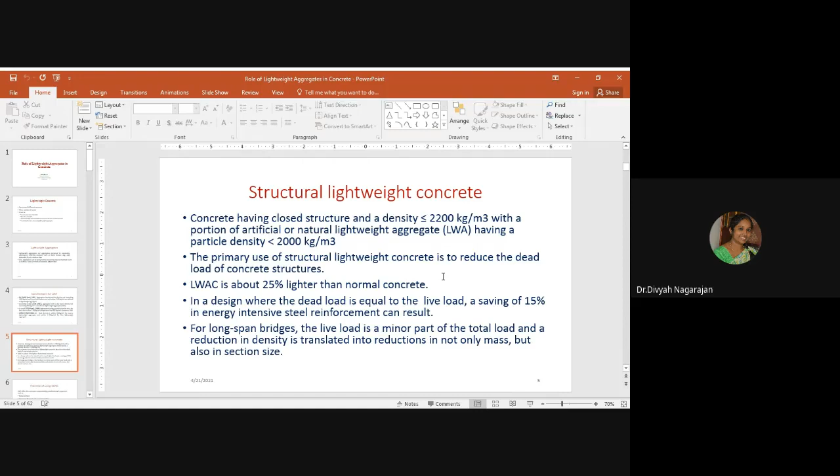For long span bridges, the live load is a minor part of the total load, and reduction in density is translated into reductions not only in mass but also in section size. Potential of using lightweight aggregate concrete. The lightweight aggregate concrete, when it is used as a construction material, has received considerable attention from the construction industry in recent years, owing to its sustainability, its nature, and we can design the concrete similar to the normal weight concrete. Therefore, the lightweight concrete is similar to normal weight concrete, except that it has lower density.

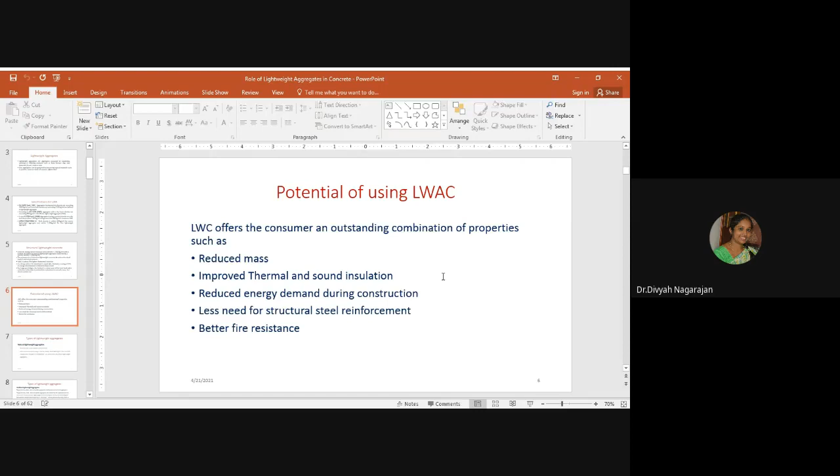The lightweight concrete offers the consumer an outstanding combination of properties such as reduction in mass, improved thermal and sound insulation, reduced energy demand during construction, less need for structural steel reinforcement, and better fire resistance. Types of lightweight aggregates. The lightweight aggregates are classified as natural lightweight aggregates, artificial lightweight aggregates, aggregates from industrial byproducts, aggregates from organic and inorganic solid waste.

Coming to natural lightweight aggregates, pumice, tuff, scoria, cinders, and diatomite are naturally available lightweight aggregates. This pumice, tuff, and scoria are from volcanic origin and they are formed by natural expansion. But this diatomite is a siliceous sedimentary rock. Since they are naturally formed, these aggregates are found only in specific regions. So they cannot be widely used, and they are used for producing lightweight concrete only in a particular area. Structural concrete having a density within 1630 kilogram per meter cube to 1885 kilogram per meter cube, and concrete compressive strength of 24 to 55 Newton per mm square can be produced using these aggregates.

Coming to artificial lightweight aggregates, expanded clay, shale, slate, and perlite aggregates, cold bonded and sintered aggregates come under this category. They are produced by some kind of manufacturing process in the industries. The raw materials used for producing these aggregates are obtained either from natural resources or from industrial byproducts. The process used in the production of lightweight concrete is either agglomeration or expansion process.

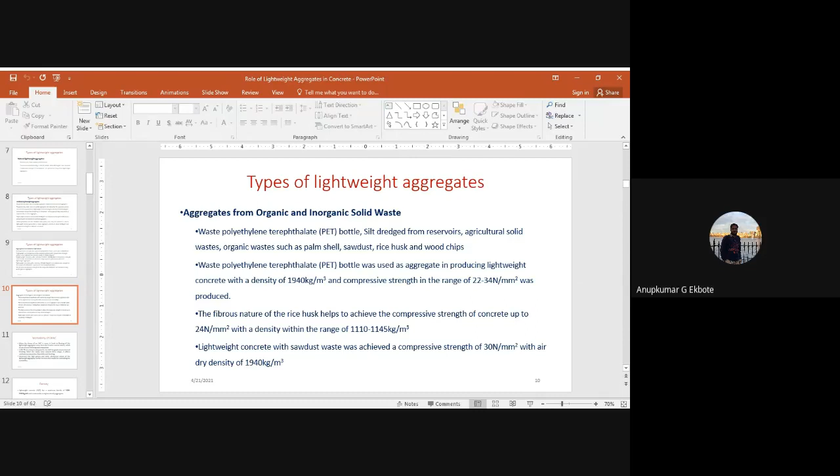The fibrous nature of the rice husk helps to achieve a compressive strength of concrete up to 24 Newton per mm square with a density within a range of 1110 to 1145 kilogram per meter cube. Lightweight concrete with sawdust waste was achieved with a compressive strength of 30 Newton per mm square with air dry density of 1940 kilogram per meter cube.

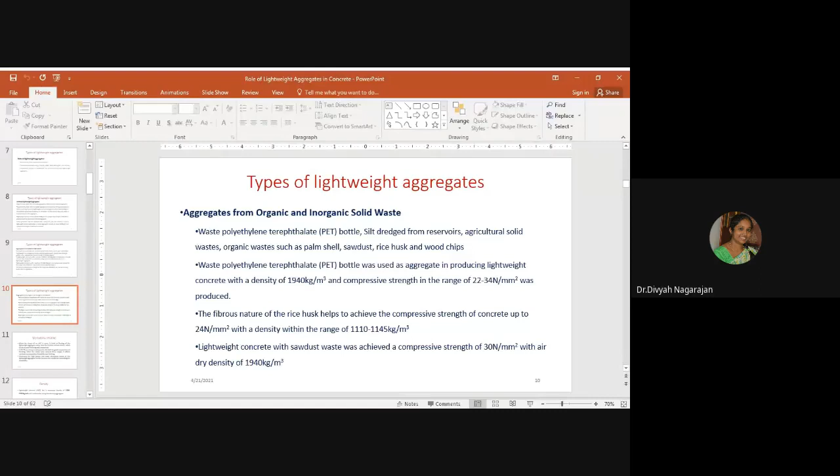Workability of lightweight aggregate concrete. This is the matter of concern when lightweight aggregates are used in concrete. The workability of lightweight aggregate concrete differs from normal weight aggregate concrete. When the slump of the lightweight concrete is more, it leads to floating of lightweight aggregates away from the heavier cement matrix, which results in poor finishing and compaction.

High slump is not required for better finishing and compaction of lightweight concrete, as in the case of normal weight concrete, since the work done by the lightweight concrete by its gravity is much lower than that of the normal weight concrete. These reasons encouraged the ACI code to limit the slump of the lightweight concrete to 100 mm for better achievement in finishing and compaction.

And studies have reported that a slump of 50 to 75 mm is adequate for lightweight concrete for good compaction and finishing. When the slump value exceeds these ranges, it affects satisfactory compaction, flowability, and finishing. Moreover, the highly porous and water absorption nature of the lightweight aggregates further increases the trouble in controlling the workability.

Coming to density, the lightweight concrete has a maximum density of 2000 kilogram per meter cube, and it can also be achieved by using low density aggregates. Compressive strength. The compressive strength of the lightweight concrete solely depends upon the mix design procedures. I have elaborated in detail in the upcoming slides about the mix design procedures adopted by myself in my project. Usually, the compressive strength of any concrete depends on the mix design procedures, but lightweight concrete can also be designed similar to normal weight concrete, but with reduced density.

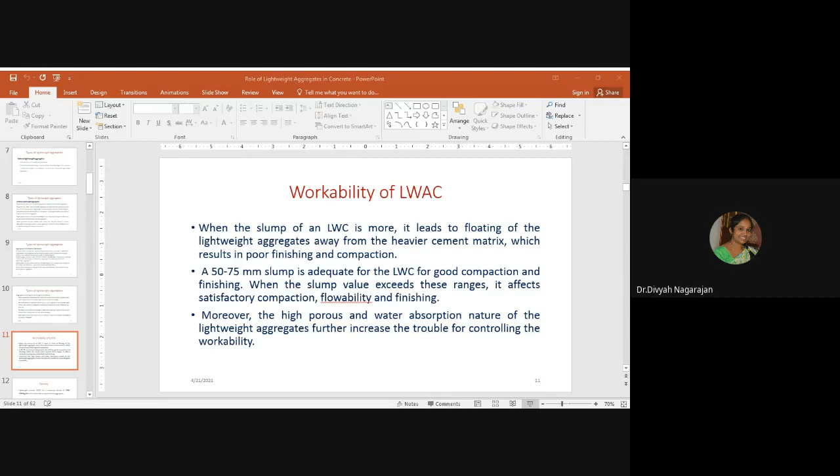Excuse me, ma'am. Ma'am, we are still on the workability slide, ma'am. Oh, is it so, sir? Now it came. I don't know why. Maybe because of the slideshow, is it like that? No, the slideshow is not on, but you can escape the slideshow and begin, ma'am. Most probably that might be causing a problem.

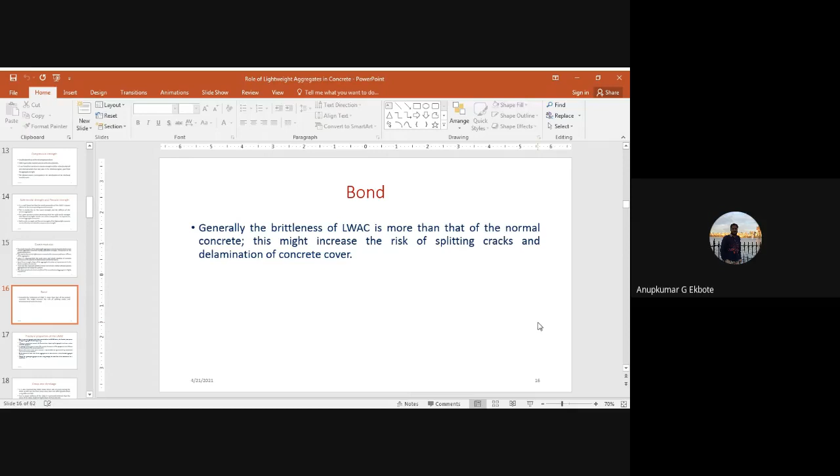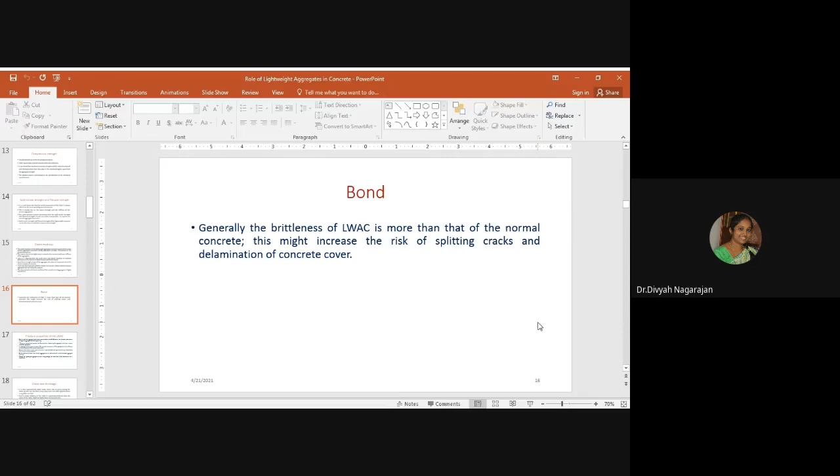Okay, sir. Bond. Generally, the brittleness of lightweight aggregate concrete is more than that of normal concrete. This might increase the risk of splitting cracks and delamination of the concrete cover.

Fracture properties of lightweight aggregate concrete. Due to the excellent aggregate-paste bond present in the lightweight aggregate concrete matrix, the fracture plane passes through the aggregate instead of bypassing it. Actually, lightweight aggregates are porous in nature. They have surface pores and voids, and they have an excellent aggregate-paste bond. So the fracture plane passes through the aggregates. That is, the aggregate splits into two halves when subjected to testing.

Whereas in conventional concretes, the fracture plane bypasses the aggregates, resulting in a plane around the aggregates. The aggregates will not break into halves, and there will be no crushing of aggregates in normal weight concrete. As aggregate occupies the major volume of the concrete, the properties of the aggregate have a vital influence on the performance of the concrete made with it. Because of its brittle nature, special attention is required before applying any concentrated loads on structural members. This is why fibers need to be added to lightweight concrete.

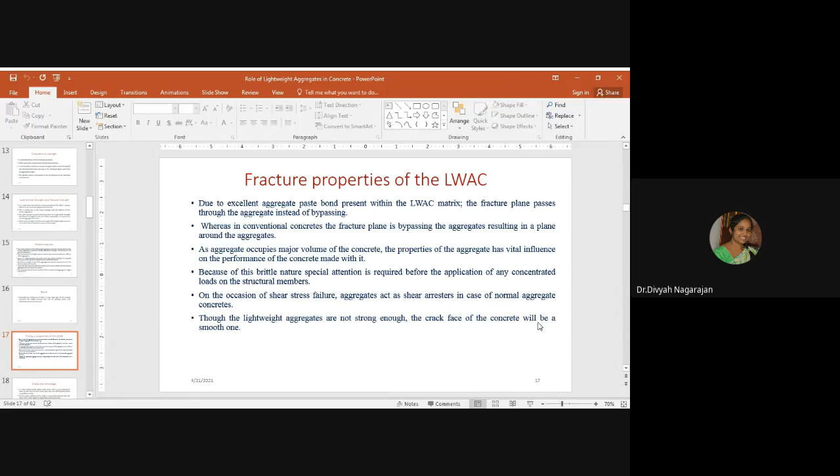On occasion of shear stress failure, aggregates act as shear arresters in normal aggregate concrete. But since lightweight aggregates are not strong enough, the crack face of the concrete will be a smooth one.

Creep and shrinkage. Coming to long-term effects of lightweight aggregate concrete, it is reported that lightweight aggregate concrete shows a faster rate of creep during the initial period. But the final creep value does not differ greatly when using different lightweight aggregates manufactured in various places. Whether manufactured or naturally produced aggregates, the final creep value will be the same for each and every aggregate.

Due to the lower stiffness of lightweight aggregates, it is generally believed that the creep of lightweight aggregate concrete might be higher than normal concrete. Drying shrinkage may also occur due to the shrinkage of the aggregate itself.

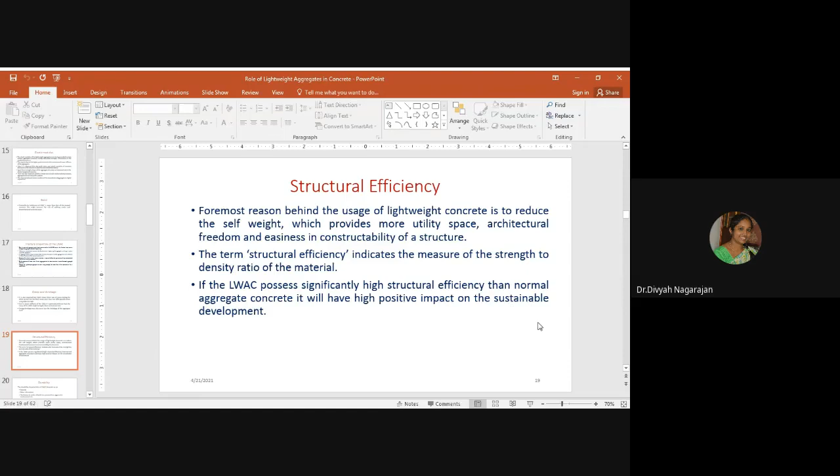Structural efficiency. The foremost reason behind the use of lightweight concrete is to reduce the self-weight, which provides more utility space, architectural freedom, and ease in constructability of the structure. The term structural efficiency indicates the measure of the strength to density ratio of the material. If the lightweight aggregate concrete possesses significantly higher structural efficiency than the normal aggregate concrete, it will have a high positive impact on sustainable development.

Durability. It is an important aspect when lightweight aggregates are used in concrete. The durability characteristics depend on porosity, water absorption, resistance to acid, chloride ion penetration, aggressive environments, and sorptivity effects of the aggregates itself.

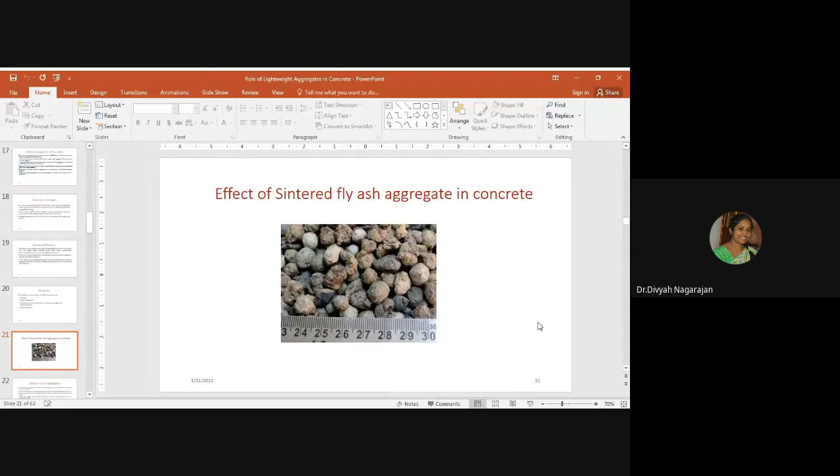I'll broadly discuss the effect of artificially produced sintered fly ash aggregate in concrete, which is my area of interest. Sintered fly ash aggregates. The sintered fly ash aggregate is obtained from the sintering process of fly ash, where it is formed into small round pellets. It is then further processed to form tough aggregates with a honeycombed internal spongy structure. When compared with natural aggregates, these hard pellets are superior, consistent, and have low density.

The sintered fly ash lightweight aggregate substitutes natural stone aggregate or chips in concrete, and hence reduces the dead weight of the structure. It can also be used in the production of lightweight precast concrete blocks for use in load and non-load bearing elements. The local availability of fly ash from thermal power plants opens up good scope, since stone aggregates are costly and also scarce. It meets concrete property requirements to achieve high compressive strength, slump, workability, split tensile strength, flexural strength, and modulus of elasticity of the concrete.

The materials used for the present investigation were cement, locally available fine aggregate, coarse aggregate, crushed bluestone aggregates, sintered fly ash aggregates, and basalt fiber. As I said earlier, the basalt fiber is added to this lightweight concrete in order to make it fit for use in structural applications. Although the sintered fly ash aggregates are good in split tension and flexural characteristics, there is some reduction in flexural strength when used in structural members. So this fiber is used to improve the split tension strength and flexural properties of the concrete.

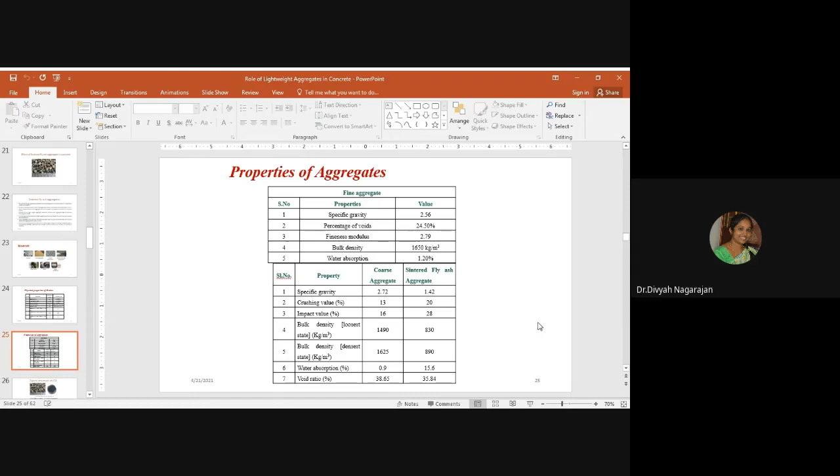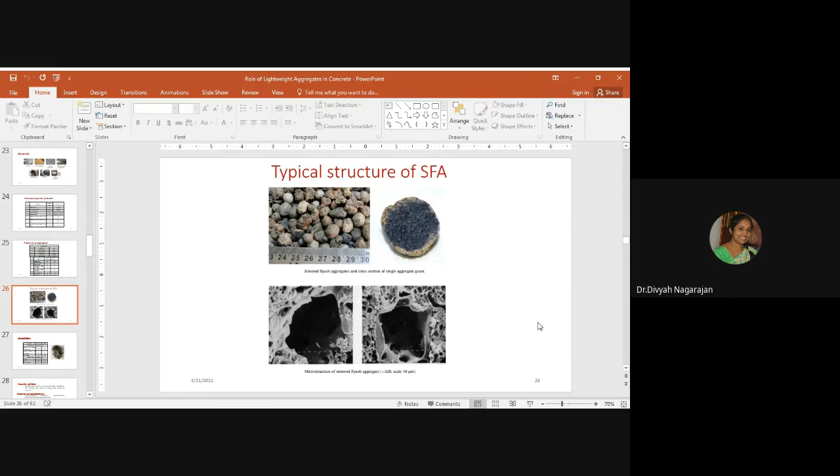Crushed angular aggregates develop good bonding with mortar paste. The strength of the bond between the aggregate and the cement paste depends upon the surface structure, surface roughness, and surface porosity of the aggregates. These sintered fly ash aggregates are rough and porous, with a large number of voids. This is the typical structure of sintered fly ash aggregate. When a sintered fly ash aggregate is broken down, the grain will look like this, and the microstructure is also shown here.

Basalt fiber of length 18 mm was used for the investigation. Potable water available in the laboratory was used, and the superplasticizer Master Glenium SKY 8233 was used because it has excellent properties that enhance the workability of the concrete. Now coming to the use of saturated surface dry aggregates. The water absorption of the sintered fly ash aggregates was found to be nearly 15.6%, which is considerable and an area of concern.

So when saturated and surface dry aggregates are used, the additional water which we add during design is also accounted for. When oven dry aggregates are used, there will be no additional water available during concreting. But when air dry aggregates are used, a little amount of water will be available, and saturated and surface dry aggregates will be fully filled with water, and they will enhance internal curing of the concrete. When damp or wet aggregates are used in concrete, they will increase the water cement ratio or water content of the concrete.

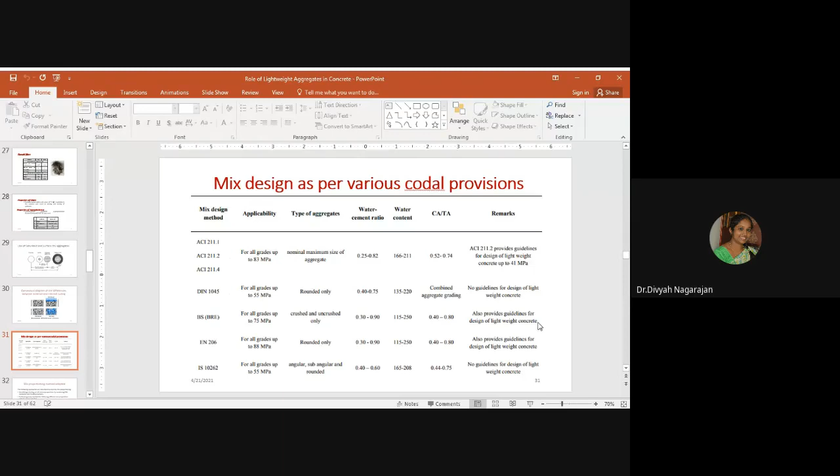The coarse aggregate or the total aggregate content varies between 0.4 to 0.75, and there are also no guidelines for design of lightweight aggregate concrete. So, although many literatures and international codes are available for mix design procedure and proportioning of this lightweight concrete, the lightweight concrete has to be mix proportioned by a lot of trial mixes. So the mix proportioning method that we have to adopt is from the trial mixes.

So I have done the following approach for concrete mix proportioning. Initially, a starting set of mix proportions were adopted combining the DIN standards and IS codal provisions, and I have performed many trial batches following different mix proportions until all criteria were satisfied. And literature reviews were done extensively, and the values were taken systematically.

By following the mix design procedures for lightweight concrete, interaction among the concrete constituents cannot be accounted for. And there is no means to achieve an effectively optimized structure for a given criterion. The usual methods for predicting the mechanical properties are generally based upon linear and non-linear static analysis, and regression models are also constructed in addition to that. Furthermore, the use of sintered fly ash lightweight aggregate in concrete modifies most of the properties of the concrete, and choosing a suitable regression equation involves technique and experience, and it is not a simple thing. So I went for optimization technique using ANN.

The total volume of fine aggregate with respect to lightweight aggregate was varied in such a way that it satisfies the mix proportion guidelines in each set. First, the water cement ratio was fixed between 0.4 to 0.45. The dosage of the cement was varied between 300 kg/m³ to 450 kg/m³ as per IS codal provisions. Next, the mix proportioning was optimized for sintered fly ash aggregate concrete using neural network derived from genetic algorithms.

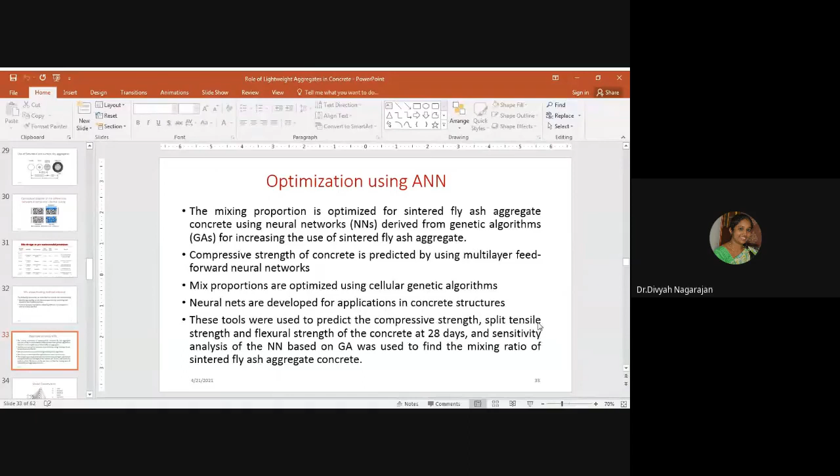First, initially, I optimized it. I performed a lot of trial mixes. Then, from literature reviews, the values were taken down, and it was applied in the optimization technique. This is the model construction. The cement, fine aggregate, sintered fly ash aggregate, super plasticizer, and water cement ratio were considered as the input layer. That is, cement, fine aggregate, the aggregates, super plasticizer, and water cement ratio play a major role in forming a concrete. They were provided as the input layer.

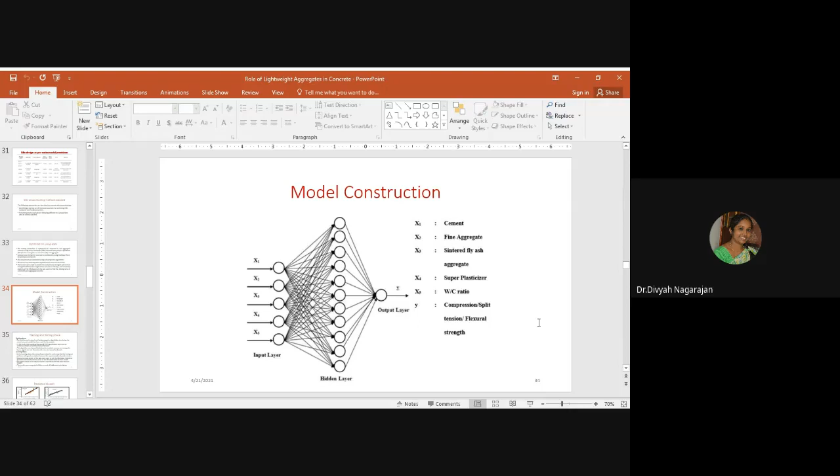Hidden layer means each and every ingredient of the concrete has influence on each other. So they were provided as the hidden layer. And the output layer was compression, split tension, flexural strength. That is, by providing the cement, fine aggregate, super plasticizer, and water cement ratio as input, I got compression, split tension, and flexural strength as output. The optimization technique involves training and testing phase. In the training phase, the feed-forward network and backpropagation algorithm is used for developing the neural networks, and it is used for the analysis. In the study, Levenberg-Marquardt algorithm has been used to synthesize models of artificial neural network.

This algorithm uses layered feed-forward networks in which neurons are arranged in layers, signals are sent forward, and errors are spread backwards. That is, multiple regression takes place. In general, in Excel regression analysis, it occurs only once, but in ANN, the neural network sends the signals back and forth, and the errors will be less. In the learning phase, the neural networks were trained in such a way that the test data performs good correlation between the experimental and predicted data.

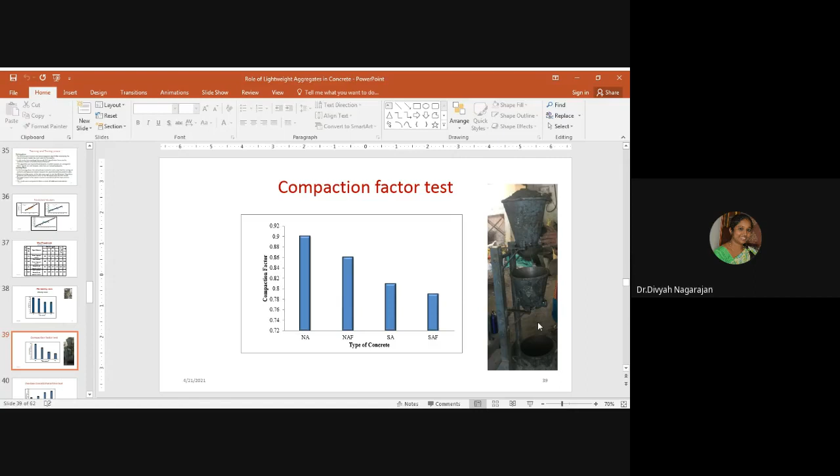Coming to non-destructive testing, prior to the destructive testing, non-destructive tests were carried out. This is an indicator to find out the quality of the concrete. Initially, the rebound hammer test was done. The rebound hammer gives the rebound number, and from the rebound number, the average compressive strength is correlated, and the quality of the concrete is found out from the code IS 13311 Part 2 1992. The sintered fly ash aggregate concrete has a very hard outer layer, and the rebound hammer test is the proof for the same. The rebound number is high for the sintered fly ash aggregate concrete, and the average compressive strength was also a little bit higher when compared to normal aggregate concrete.

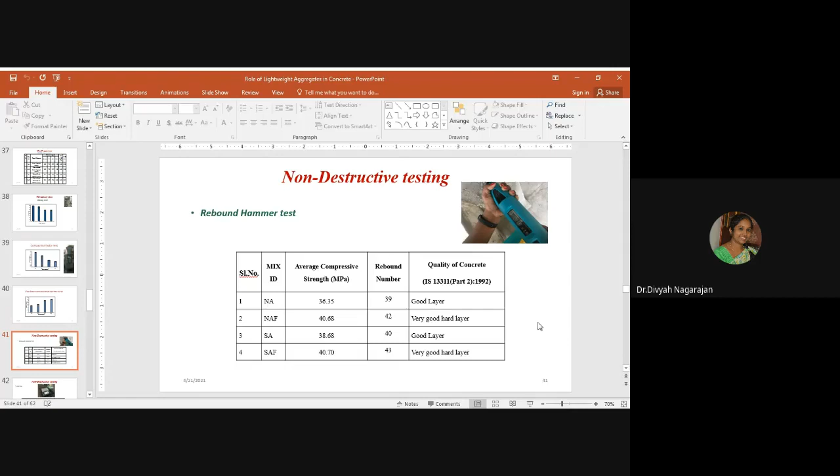Coming to UPV test, the UPV test is also an indicator of the quality of concrete. The density of the concrete can be determined through the pulse velocity. Owing to the porous nature, the lightweight aggregate concrete had a medium quality, and the density is lower when compared to the normal aggregate concrete, and the pulse velocity is considerably lower when compared to the normal aggregate concrete.

Compressive strength. As I said earlier, the production or mix design of the lightweight aggregate concrete was tedious, and it involved a lot of trial mix proportioning, and ANN and a MATLAB tool were also used for proportioning of the concrete. Accelerated curing was also used as an indicator to find out the compressive strength of concrete.

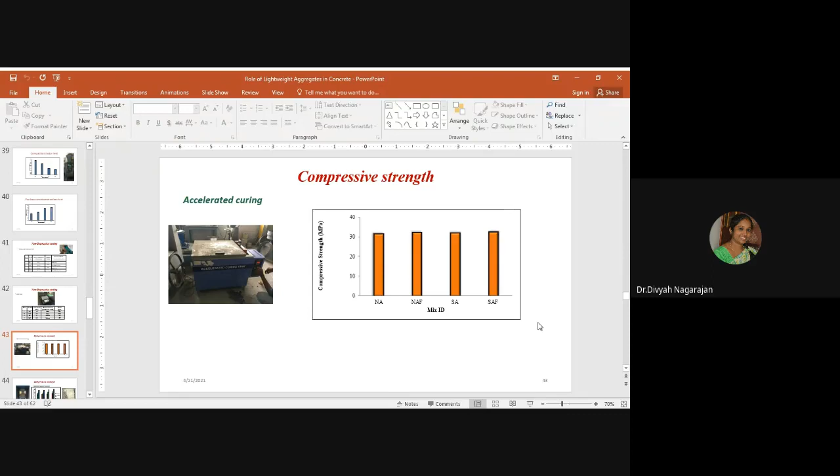The accelerated curing tank was used, and the water boiling method was adopted, and within 24 hours the compressive strength was estimated. It is not the exact compressive strength that will be attained at 28 days of age, but it somehow predicted the nearby compressive strength of the concrete. It can be seen from the graph that the compressive strength predicted through accelerated curing is above 30 MPa for all types of concrete.

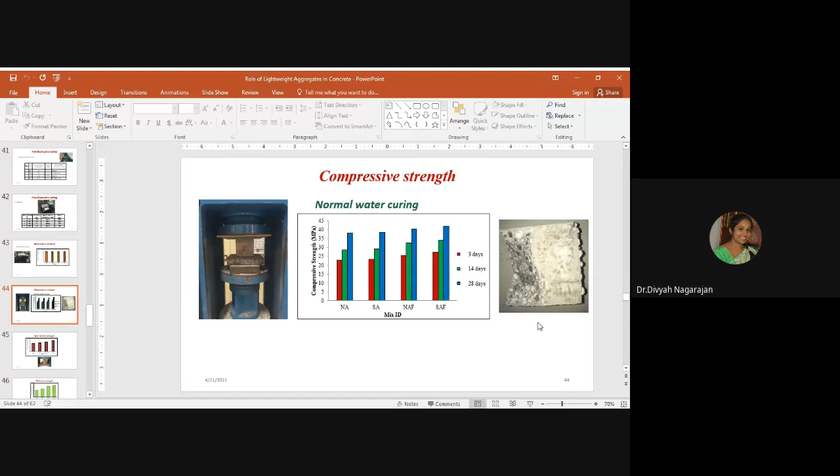Coming to compressive strength using normal water curing, the 3, 14, and 28 days compressive strength was found out. The sintered fly ash aggregate concrete was designed to have a similar compressive strength as the normal aggregate concrete. The M30 grade of concrete was achieved, and the target strength was also achieved through the mix design. And this is the split section of the specimen.

Now coming to the split tensile strength, as I said, the sintered fly ash aggregates have better tensile properties when compared to other lightweight aggregates. So there is not much difference in the split tensile strength when compared to the normal aggregate, but when fiber is added, the split tensile strength increased.

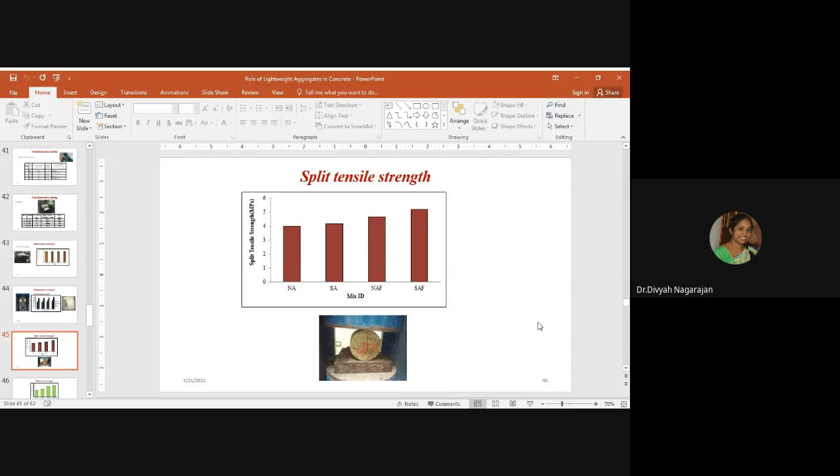But it is not due to the bridging effect of the fiber, because the basalt fibers are short and discrete fibers. There will not be much bridging effect when using basalt fiber. Steel fibers serve this purpose a lot, but basalt fiber is added to this concrete in order to avoid the cracking of the aggregates when subjected to loading, since this concrete has to be used in structural members.

Flexural strength. The flexural strength was also found out, and the addition of fiber improved the flexural strength. Sintered fly ash aggregate concrete without fiber also had around 1.5 times more flexural strength when compared to the normal concrete.

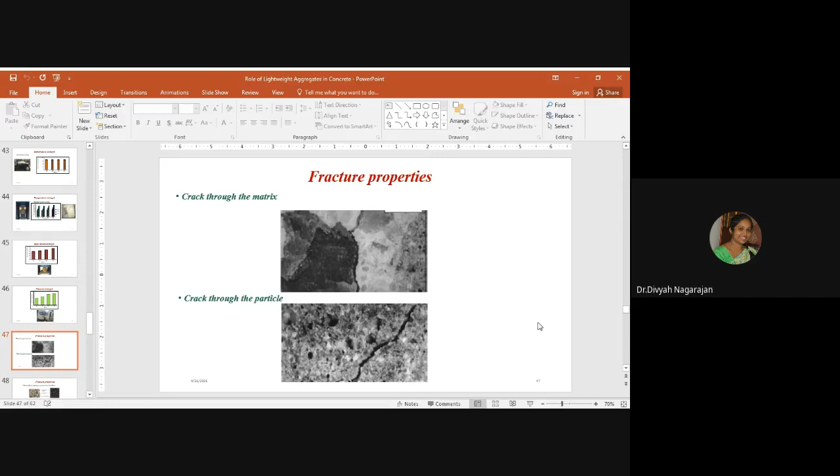Fracture properties. Coming to the fracture properties, observing the cut section of the specimen, it can be seen that the crack had occurred through the matrix, and the second picture shows the crack through the particle. Here I have elaborated the fracture properties using MATLAB image processing. I have image processed the cut section of the specimen using MATLAB software to study in detail.

It is because of the excellent aggregate paste bond present between the cement and the lightweight aggregate matrix. The fracture plane passes through the aggregate instead of bypassing it, as can be seen from the figure. Whereas in conventional aggregates, it is a known fact that the fracture plane bypasses around the aggregates. It has a vital influence on the performance of the concrete. As I said, it influenced the split tensile strength and the flexural strength a lot.

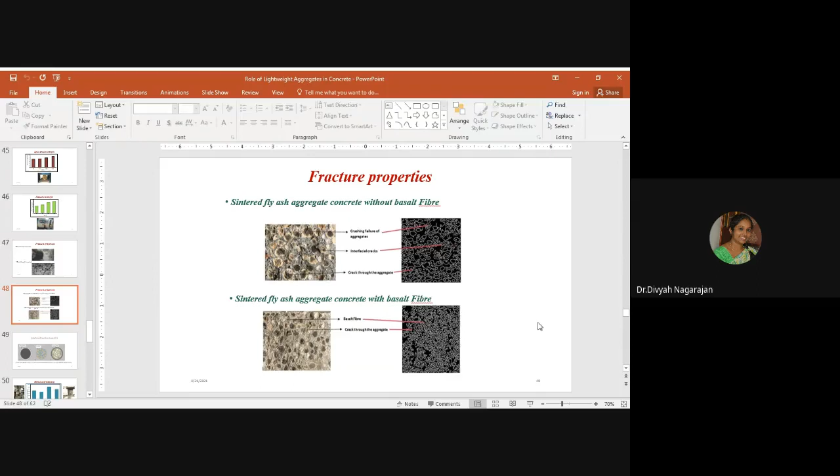Interfacial transition zone. Being porous aggregates, these aggregates have a strong interfacial transition zone. The interfacial transition zone has significant influence on the mechanical and durability properties of any hardened concrete. The quality of the interfacial transition zone depends on the type, density, surface structure, and moisture state of the aggregates. Therefore, the sintered fly ash aggregate, being porous in nature, has a good interfacial transition zone.

Due to high integrity between the lightweight aggregate and the surrounding cement paste, lightweight aggregate concrete generally exhibits excellent performance under severe exposure conditions. For normal aggregate concrete, the wall effect exists due to intrinsic size differences between cement particles and aggregates. This results in inferior concentration of cement particles near the aggregate surface when compared to bulk cement paste.

During the initial stages, the ITZ generally has a higher water to cement ratio, and the interparticle spacing is higher compared to the bulk paste. Lack of proper curing at early stages may result in imbibing water from the pores within the interfacial transition zone. This creates large pores near the zone.

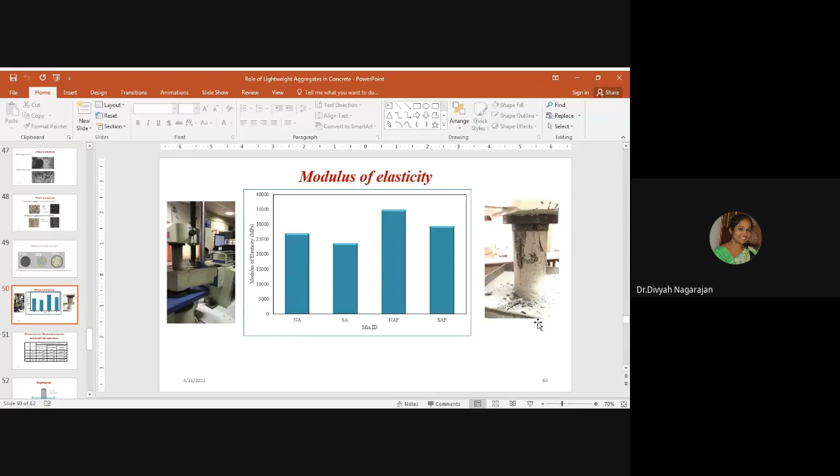Yes, when 100% replacement of the coarse aggregate is done, there will be lower peak stress. Determination of the elastic modulus of manufactured aggregates is highly impractical because of variation in the production process. The modulus of elasticity of the sintered fly ash aggregate concrete is comparatively lower when compared to the normal aggregate concrete, but addition of fiber increased the modulus of elasticity.

Now, the relation between mechanical properties determined through experiments was correlated with various codes of practice. The relation between compression and flexure is 0.7 root FCK as per IS codal provision, whereas I obtained 0.85 root FCK for normal aggregate concrete. When fiber is added to the normal aggregate concrete, it is 0.94 root FCK. For sintered fly ash aggregate concrete, that is lightweight concrete, it is 0.83 root FCK. When fiber is used with sintered fly ash aggregate concrete, it was 1.08 root FCK.

As I said, the split and the flexural strength can be directly correlated with the compression strength. The relation between compression and split tensile strength for normal aggregate concrete is 1.75 root FCK. When fiber is added, it reduced to 1.72 root FCK. For sintered fly ash aggregate, it was 2.03 root FCK, and it reduced to 1.97 root FCK when fiber is added.

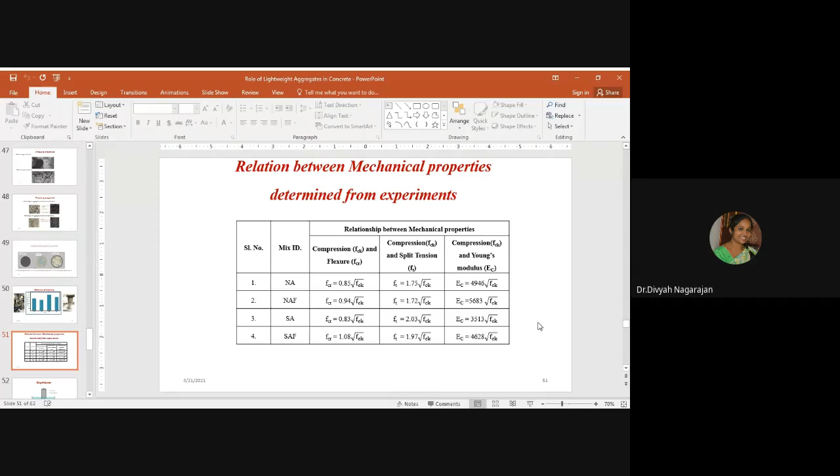Sorptivity test. The durability test plays an important role in lightweight aggregate concretes because of its surface structure, porosity, or nature. So I have carried out the sorptivity test to evaluate the penetration of water against the capillary index. A concrete cylinder was used for this purpose, provided with two layers of waterproof coating. A tub was filled with water to about 2 centimeters, and to allow free penetration of water, steel rods were kept at the bottom. The sorptivity was observed for 24 hours. Sorptivity is a property of a porous material that tends to transmit water by capillary absorption.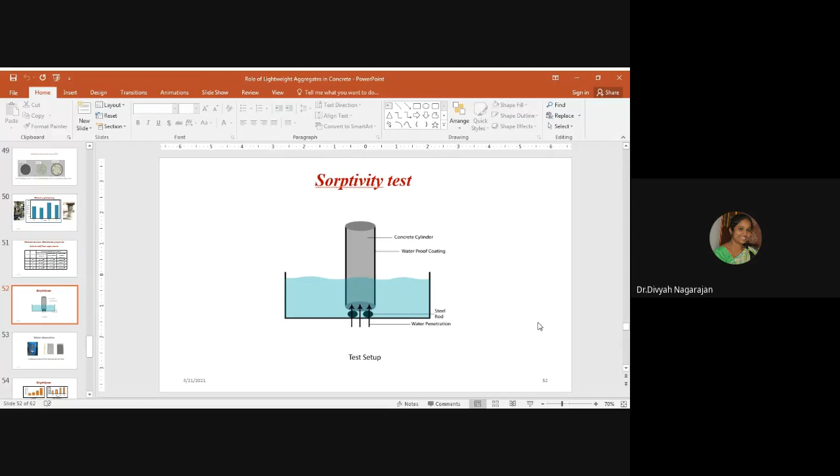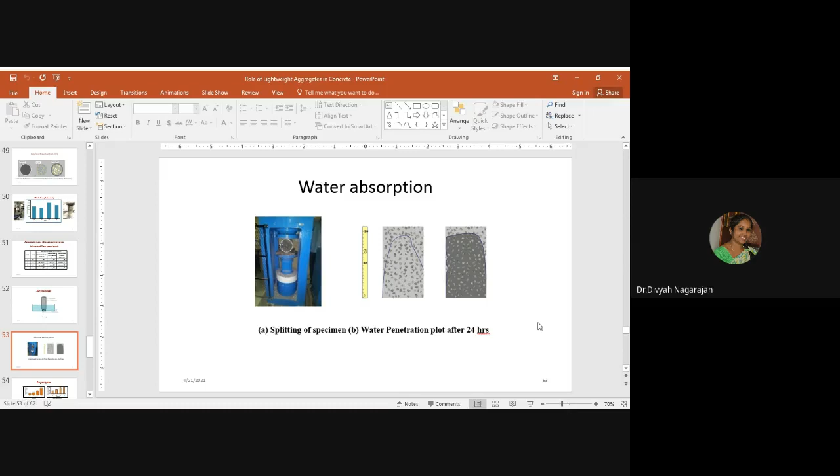After 24 hours of the sorptivity test, the cylinder was split into two halves, and the water penetration plot was taken to know how much water was absorbed within 24 hours. The pattern of absorption was observed, and the cumulative water absorption with respect to elapsed time was calculated. Sorptivity, water absorption per unit area of the inflow surface, and porosity were calculated from the sorptivity test. At the initial stage, an increase of sorptivity was observed, which decreased gradually over time.

The lightweight concrete responded with increased sorptivity when compared to the normal weight concrete. However, the addition of basalt fiber reversed the overall results, with a sorptivity 2 times higher than without fiber. This reason has to be sorted out. As per the acceptance limits of the durability indices, sorptivity in mm per hour for laboratory concrete should be less than 6 at 24 hours of observation. The test results were within the acceptable limits, indicating that the concrete is durable in terms of sorptivity.

Water absorption. The water absorption of the concrete mix was calculated during the 24 hours of observation. The sintered fly ash aggregates showed 16% higher water absorption, but as a matrix inside the concrete, the rate of water absorption is considerably low. When sintered fly ash aggregates alone were tested in the laboratory, they had 16% water absorption. But since saturated surface dry aggregates are used in the concrete, it had a better impact on the concrete.

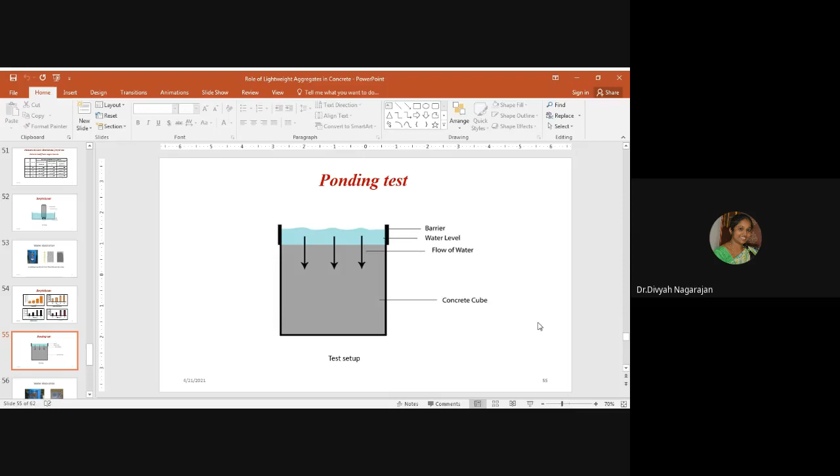Ponding test. The ponding test is carried out in order to find out the penetration of water towards gravity, as in the real case when there is stagnation of rainwater or water on concrete structures. So above a concrete cube, a barrier is built, the water level is maintained for about 24 hours, and the flow of water occurs towards gravity. And this is the test setup.

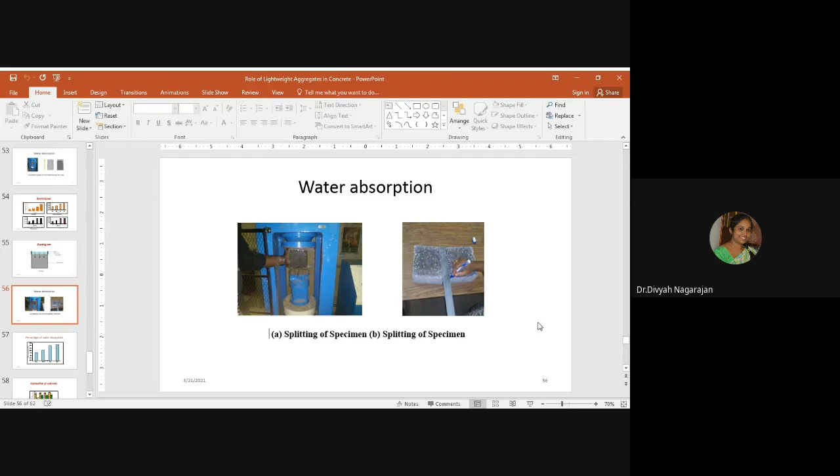Water absorption. After subjecting to 24 hours of water ponding, the specimen was split into two halves, and the water absorption plot was done. Coming to the percentage of water absorption, on comparing the water absorption percentage of the mix subjected to ponding and sorptivity, there were no significant variations in the observation, because this is a long-term effect. When it is subjected to 24 hours of observation, it directly gives the water absorption, and the specimen size also plays a major role. The sorptivity and ponding test provided almost the same water absorption percentage.

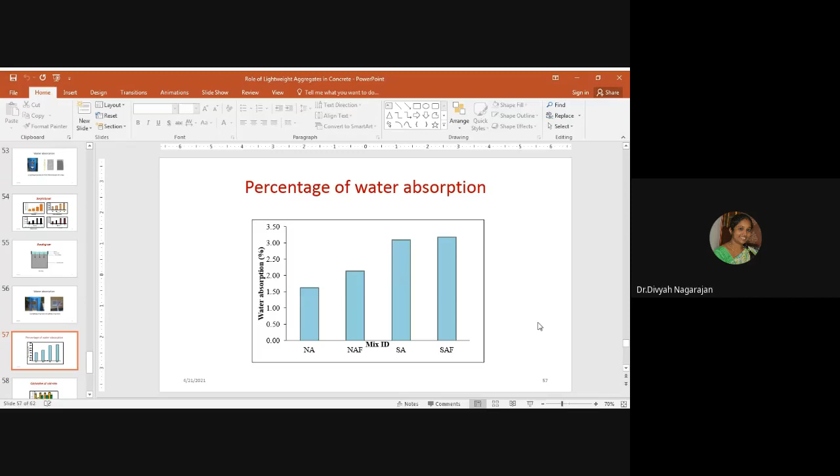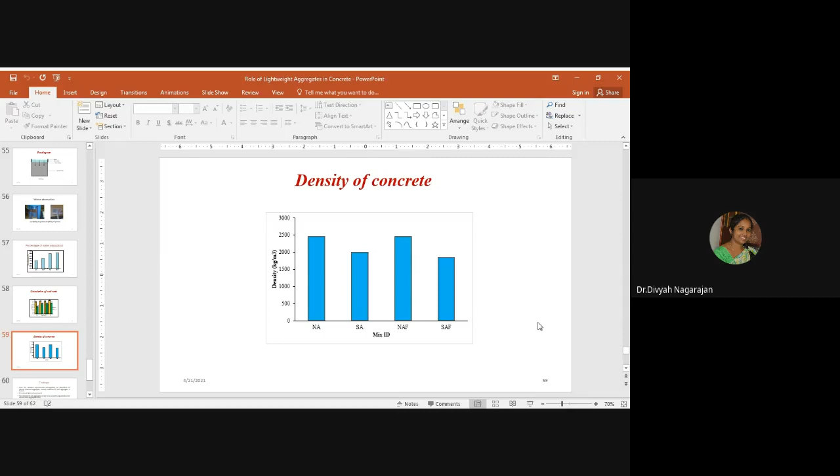Density of concrete. The sintered fly ash aggregate had a dry density of about 895 kg per meter cube, whereas the normal aggregate dry density was 1,625 kg per meter cube. The normal aggregate concrete had a higher density, the usual density of about 2,500 kg per meter cube. Basalt fiber is lightweight in nature, and being lightweight, it did not affect the density of the concrete, which is the intended property of a structural lightweight concrete. This is why basalt fiber is used for this purpose.

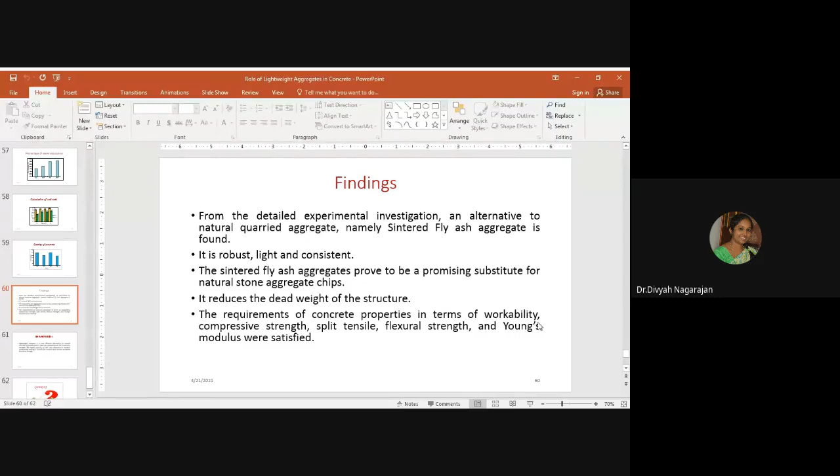Therefore, in a nutshell, not only the sintered fly ash aggregate concrete but lightweight concrete in general is a cost-effective alternative to normal concrete, especially since it does not compromise on the structure's strength. The higher porosity of lightweight concrete also influences its thermal conductivity, making it suitable for projects that require insulation from heat damage. Thank you.